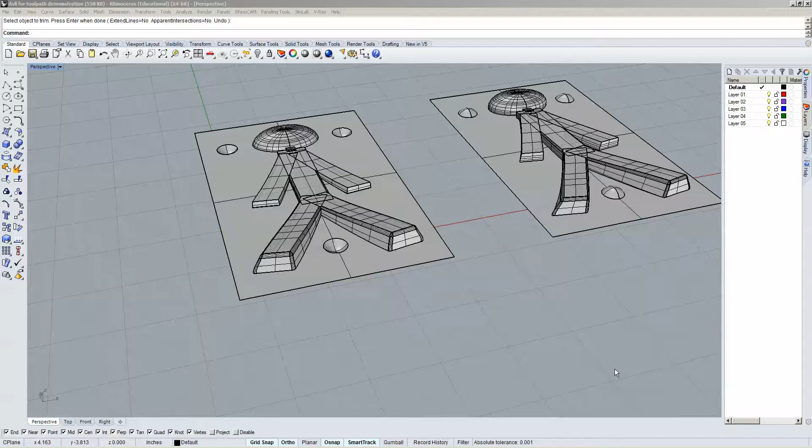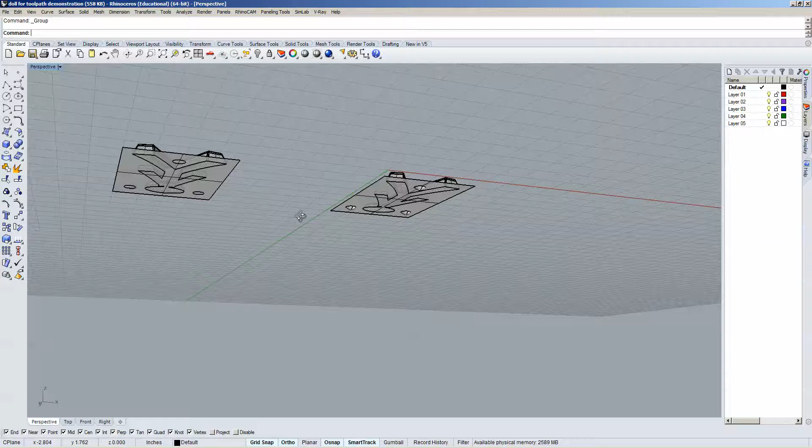Okay, now we can view these as millable surfaces, and we need to do it for both, but we only need to demonstrate it for one. I'm going to select everything and join everything, and looks like I'm going to group everything for now, so that if we accidentally move one, we move the other. It doesn't matter if these are cut and joined. As before, the CNC only sees the surface. So let's do this.

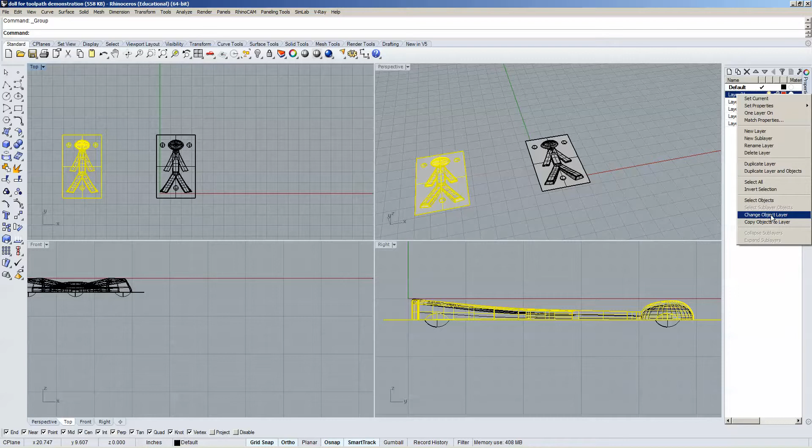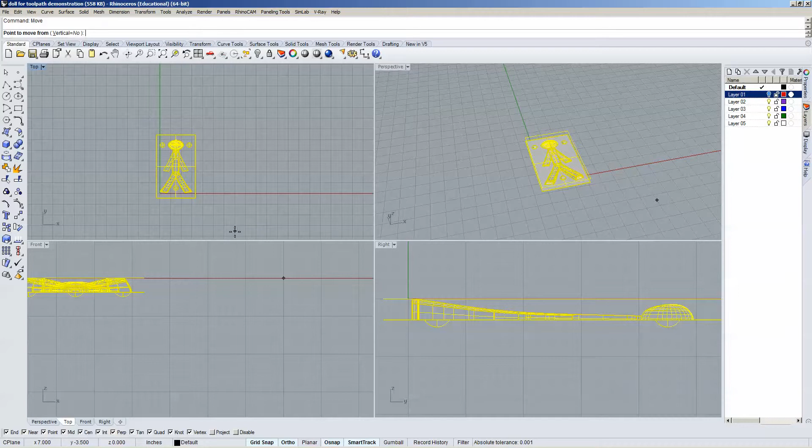Oops. Let's group these separately. I'm going to change that later so we can just get it out of our sight. Okay. Let's do this. Turn my ortho off here so I can move this. Okay, so that's where I want to be right now, so just under the surface.

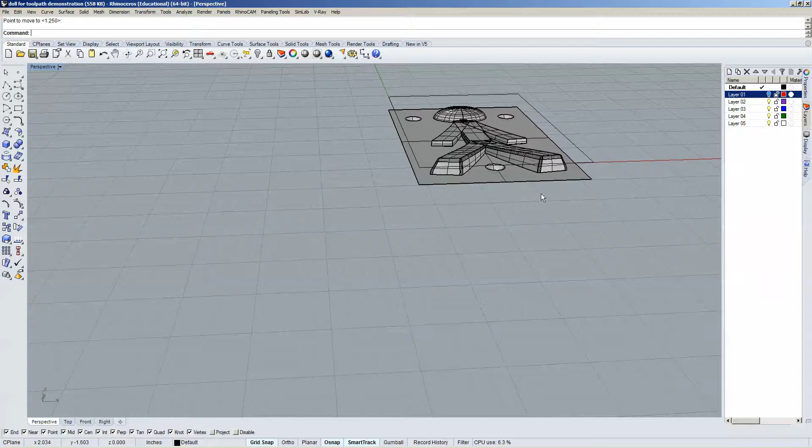And now what I can do is open up our machining browsers, go into the knowledge base, and we are going to be looking at wood again. And we're going to do a couple things. We need to be able to cut the whole object out, and then we're going to be doing 3-axis work.

So let's do a profiling, and so the hardness of the wood is going to be closer to MDF. So let's run this over here, and then we'll do 3-axis parallel machining. And if we need to copy and paste anything, we will do that a little bit later. All right, we've got everything we need.

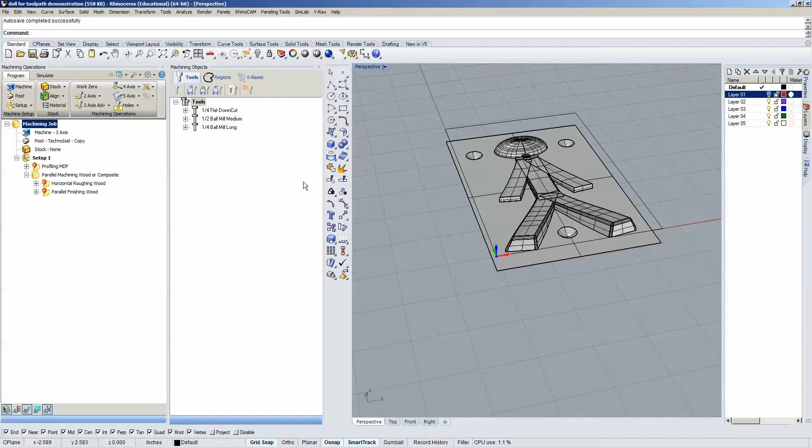Garbage truck in the background as well.

Okay, so we need to do something different with this model than we've done in the past. We need to rough this out. So you see when you bring the parallel machining over, there's a roughing and a parallel finishing. So let's set up the roughing. We know we're going to have to do the profiling last. I'm going to change this order.

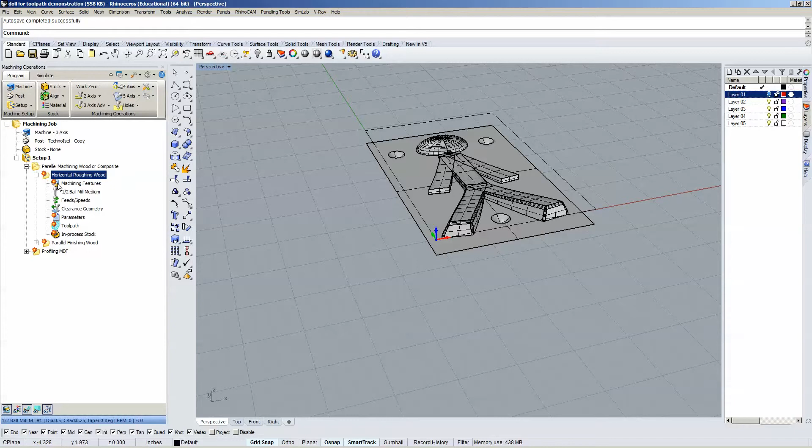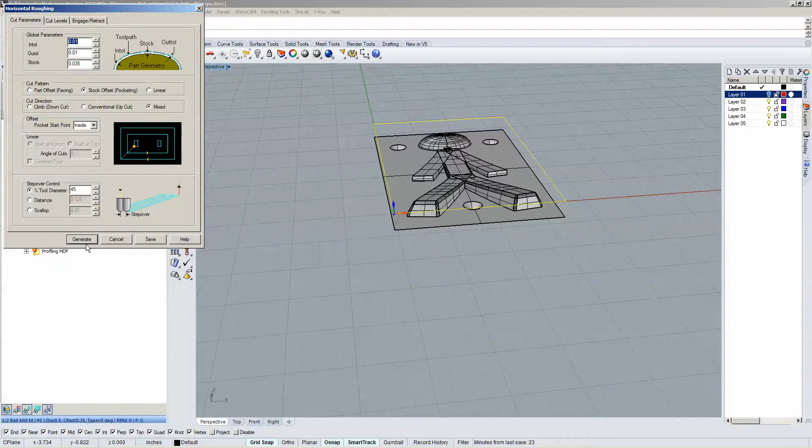Okay, so let's go ahead and click here, select the containment region, and I had brought that curve over, and we hit enter, save that. We'll go ahead and do the roughing with a 1/2-inch ball mill. That'll clear out material rather quickly. It means we'll also have a tool change. Okay, and then parameters, let's just leave it where it is. I'm going to generate it so we can take a look.

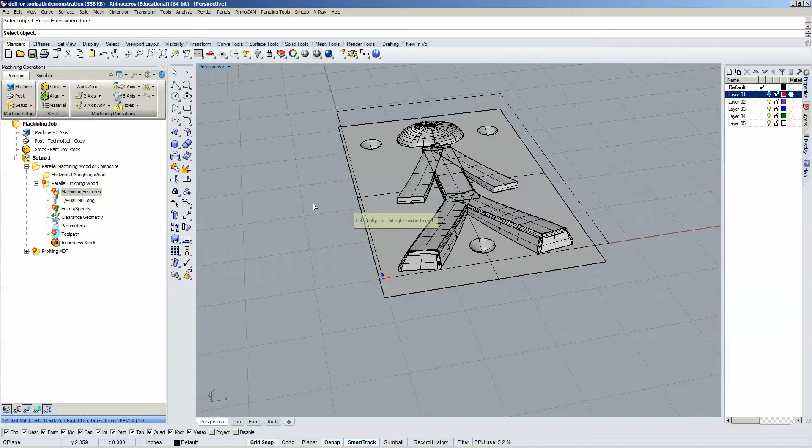So you can see it's just one pass. It's fairly shallow, and the mill is just going to mill out a little bit and certainly miss quite a bit of the model. It's designed to leave material behind. If we did the same thing very quickly, parallel finishing, and just generate it, you're going to see the combination of roughing and parallel finishing.

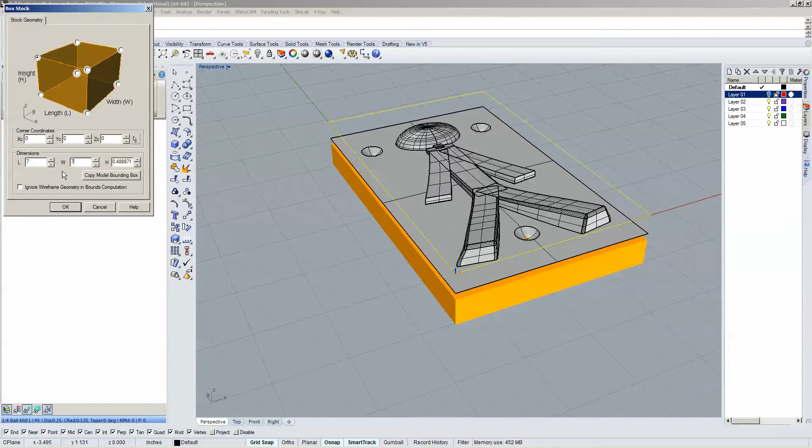So what we can do is set up the stock to visualize this. 0, 0, 0. And then we're going to have, let's just say we've got 7 length, and then let's do 7 by 7, and let's assume we've got maybe 1 inch. We're going to have to measure our starting point, something like that.

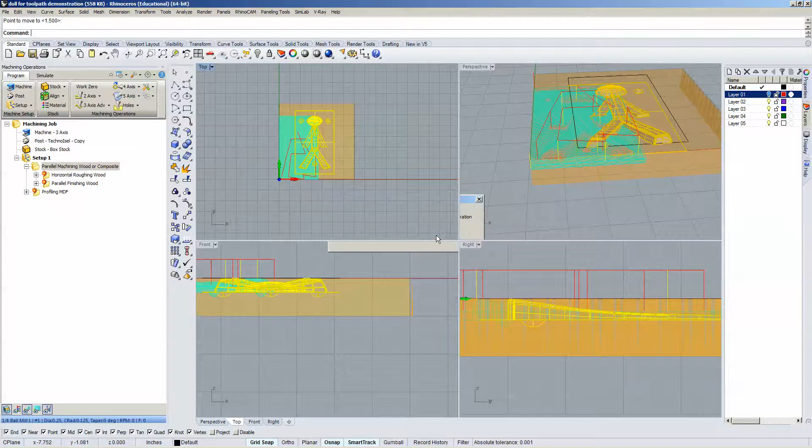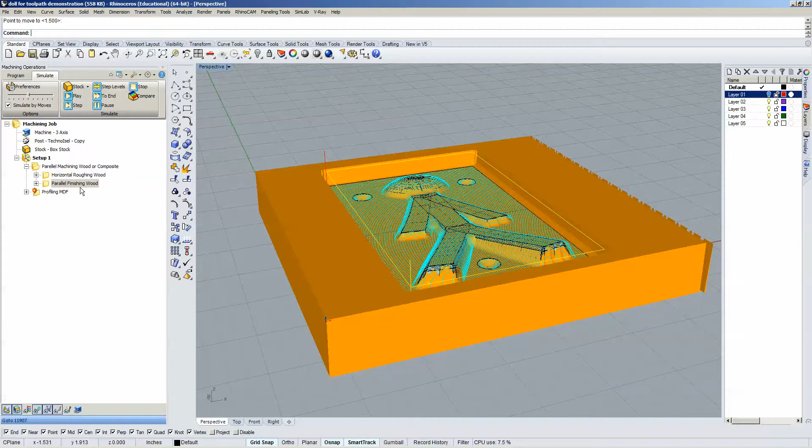I'm going to go ahead and move this material in our stock. Give us room to have fasteners. That also means I'm going to have to regenerate all those tool paths. So now I can go to simulate. And so it is, all right, so that's a better view.

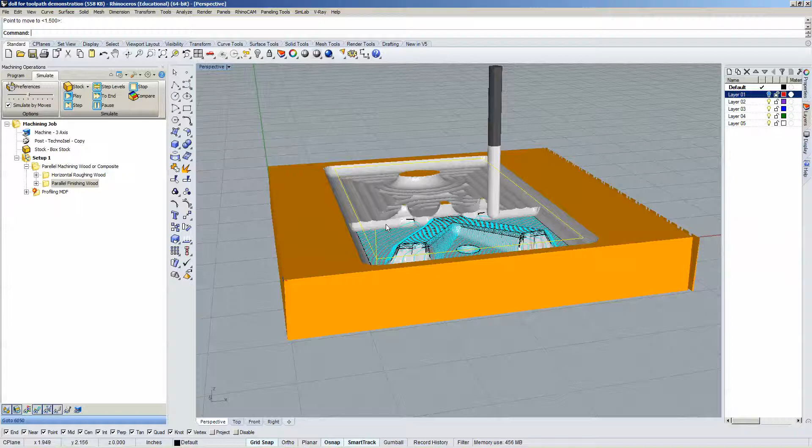So you can see here that the roughing doesn't take a whole lot of material out, but it does very quickly remove a chunk of material. So it looks like we're going to have a bit of material left for the finishing pass. I might even want to change the step down and have 2 roughing passes done. Let's continue playing this. It's in a couple spots there. It looks like it's going to be a lot for the bit to do. I think it's going to be fine though. Okay, so then we'd have that.

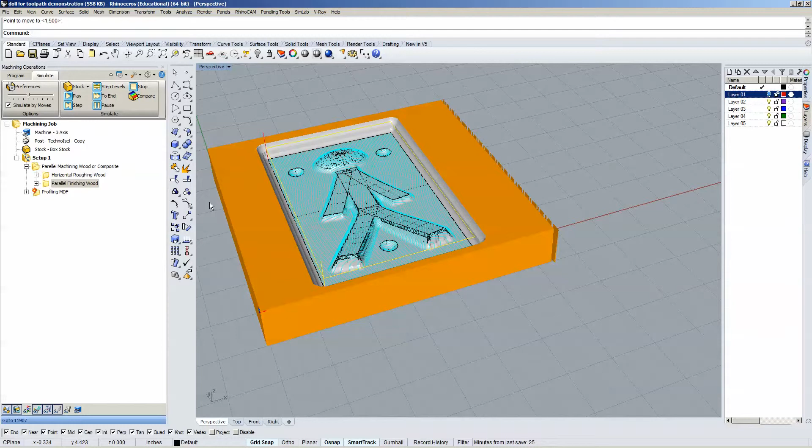Then our last step would be to cut this whole object out with a profiling pass, which we already know how to do. So one thing to note is you see here there's going to be a little bit of curvature, and so what we're going to need to do is come in and clean that edge up, and we'll talk about that as a class. So what we need to do is have a line there that's going to tell a second bit to come in and do a profile pass, and it's going to square that edge out.